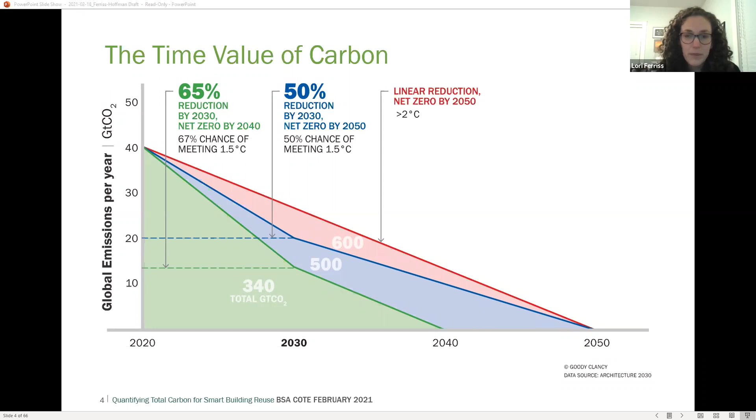At the same time, we're faced with the challenge of astronomical growth in square footage. Between now and the year 2060, we're projected to double our built square footage. That's roughly building a new New York City every month around the world. Trying to reduce carbon emissions while still managing this growth is a huge challenge.

But existing buildings are really an asset here. We know that by reusing and retrofitting an existing building instead of building new, we reduce upfront carbon emissions, the embodied carbon emissions, by up to 70 to 85%. So it really challenges us to think more carefully about how we can reuse the buildings we already have before we build new.

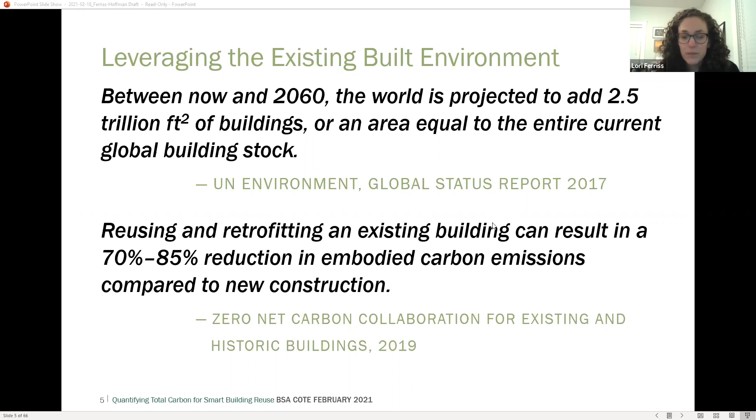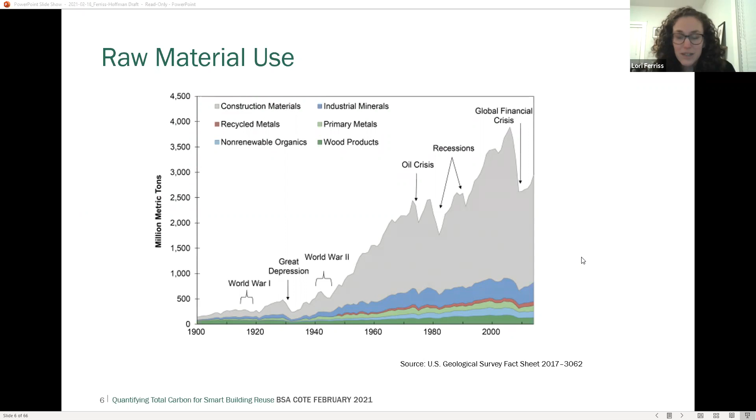And it's not just about carbon, that's what we'll really be focusing on today, but we know that the impacts of building materials expand into all different types of environmental and human health impacts. Globally, raw material extraction is responsible for 90% of biodiversity loss. We know there are tremendous human health impacts associated with processes like manufacturing of bricks. So there are really impacts both at the site of the building and throughout the entire supply chain that we need to be thinking about.

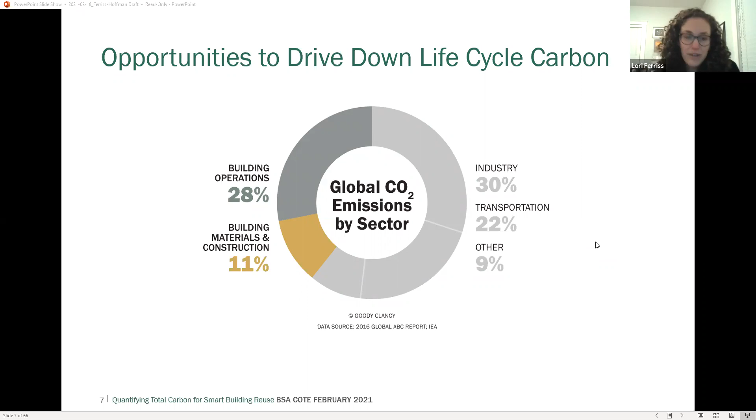Back to carbon, buildings are responsible for 40% of emissions globally. Roughly 28% of that is from building operations, while 11% are from the materials going into buildings. So when we reuse an existing building, we have the opportunity to drive down both of these wedges, both by improving efficiency and reducing operational emissions, and by avoiding the creation of new materials and new construction, driving down that 11% of embodied emissions.

Thinking back to the time value of carbon, it's helpful to plot these emissions over time. Looking at operational emissions, at the beginning of a building's life there are zero operational emissions, and every year as the building runs, it uses a certain amount of electricity, responsible for a fairly steady rate of carbon dioxide emissions over time. Every time we intervene in a building, we have the opportunity to reduce that slope. That's what we're looking to do every time we retrofit or renovate a building, push down that slope as much as possible, resulting in total operational savings over time.

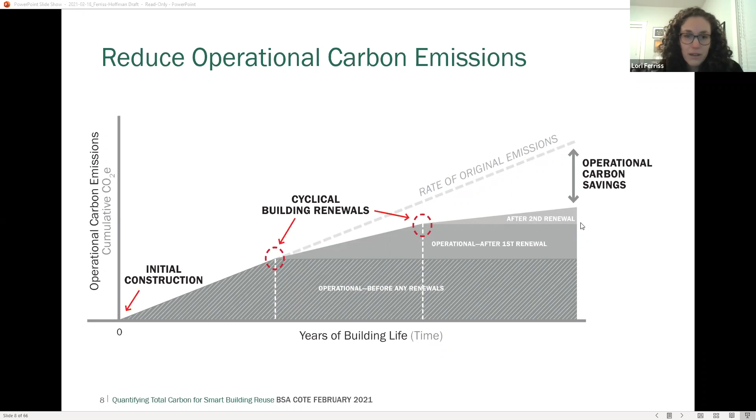With embodied emissions, on the other hand, we start with a large upfront chunk of emissions, but then emissions happen only at those points of renewal, and it's fairly steady the rest of the time. Unlike with new construction, we're not concerned about the embodied carbon of material that already exists—that's a sunk cost. What we care about are the embodied emissions associated with materials we add to the building every time we renew it.

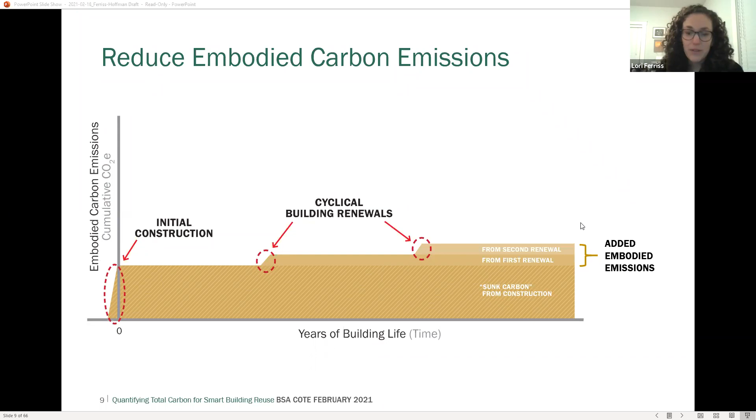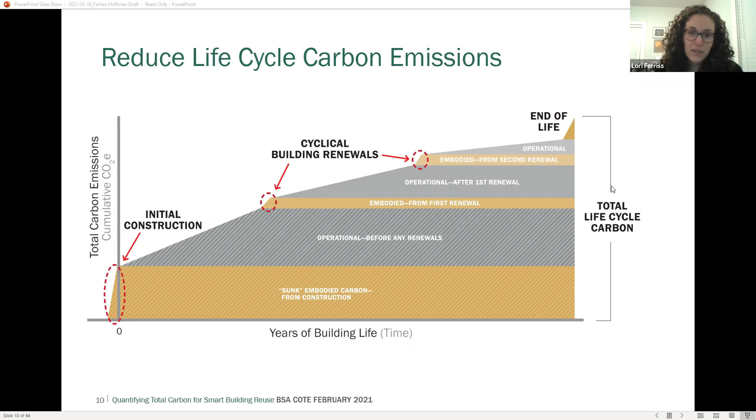Ultimately, it's about the total carbon—adding those two together and understanding the cumulative total carbon over time, and looking for the best ways to reduce it as quickly as possible.

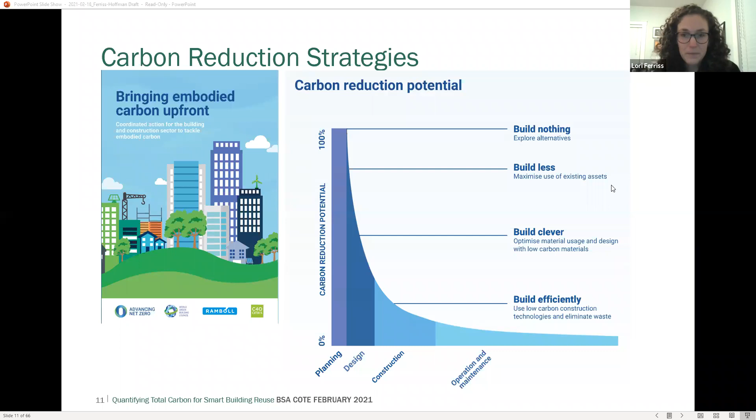I think most of you are probably familiar with life cycle assessment, the tool we use to quantify those life cycle impacts. It's a technique that's actually quite simple, used across many industries, but it just quantifies the environmental impacts associated with all stages of a product or assembly from cradle to grave.

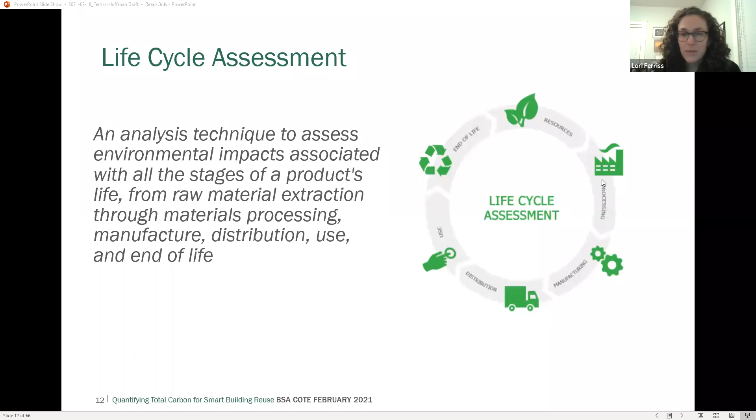I want to end this introduction by pointing out that LCA is a tool like energy modeling or any other analysis tool, and you have to know what questions you're asking to get meaningful data out of it. When talking about life cycle assessment for existing buildings, the range of questions you can ask varies hugely. It can be very detailed—should I use insulation A or insulation B to reduce my carbon footprint—all the way up to the very large scale: how much carbon can I save by reusing this building over the next 10 years? We'll try to illustrate some of this range of questions that LCA can help us answer.

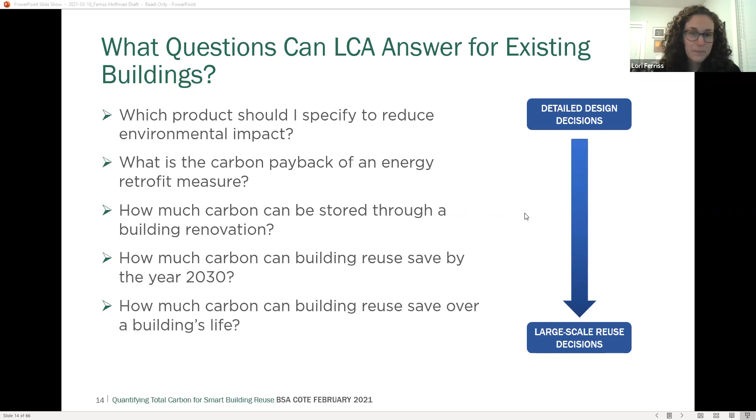So I'm going to pass it off to Elaine for this first case study.

Typically when we think about the best way to reuse the built environment, we commonly think of deep energy retrofits, which tend to be defined solely around operational energy. I'll read these two definitions: Rocky Mountain Institute defines them as a whole building analysis and construction process that achieves much larger energy cost savings, sometimes more than a 50% reduction, whereas the New Buildings Institute defines it as a project that achieves at least 30% energy savings in a building.

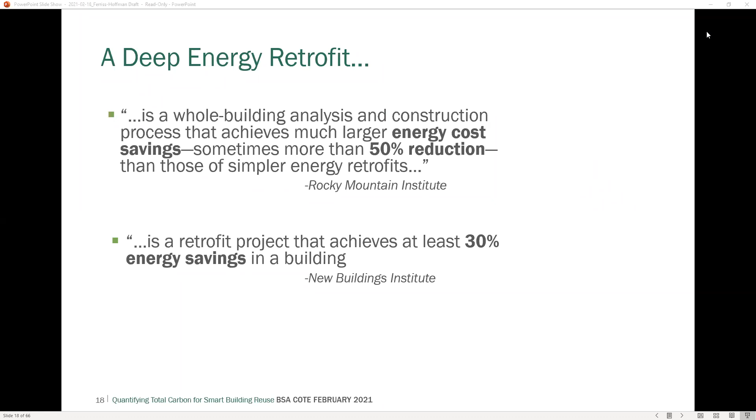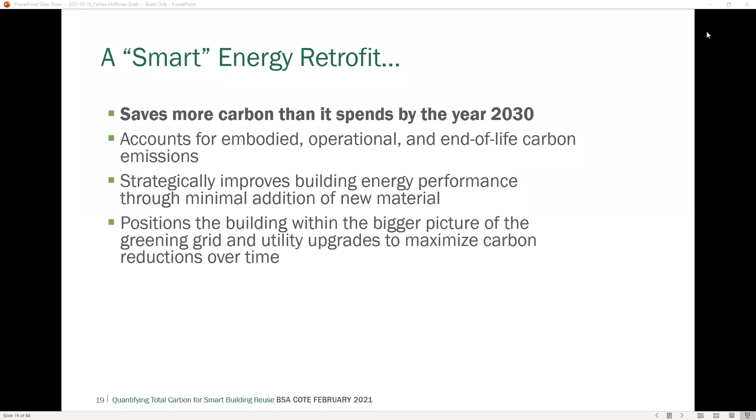But with those definitions, we really aren't recognizing the other carbon impacts. So what we're trying to do through the course of this study is define what a smart energy retrofit would be—one that saves more carbon than it spends by the year 2030. That's the most important aspect of this definition, but it also accounts for embodied, operational, and end-of-life carbon emissions, strategically improves building energy performance through minimal addition of new material, and positions the building within the bigger picture of the greening of the grid and utility upgrades to maximize carbon reductions over time.

So for this study, we began by identifying project goals, established evaluation criteria, created an extensive list of potential scope items, analyzed these scope items relative to the established criteria, proposed phasing and bundling of the scope items, and also drew some conclusions.

Our primary objective here was to establish a method for designing a smart energy retrofit. We also wanted to understand which interventions have the best financial and carbon return on investment, draw conclusions about energy retrofit approaches that are broadly applicable, and create a project that supports the campus's carbon neutrality goals within real world constraints.

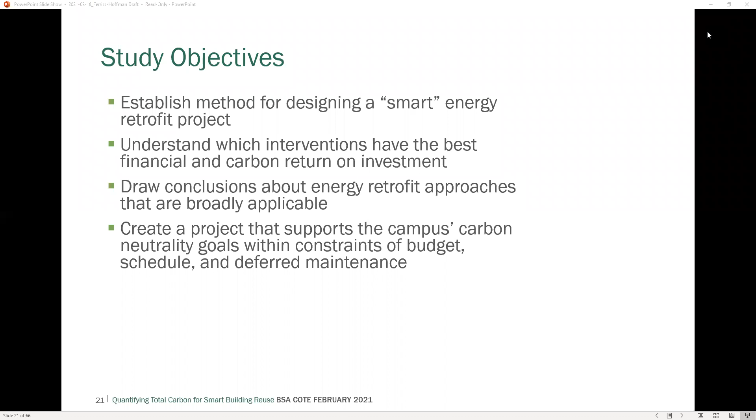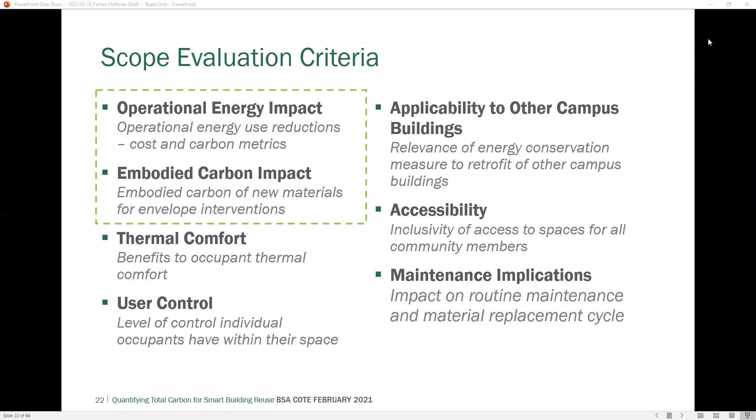For renovation projects, there are clearly many factors that drive the project scope. Over the course of this study, we were evaluating scope items against all of these criteria, but for the purposes of this presentation, we're going to focus solely on operational carbon and embodied carbon impacts.

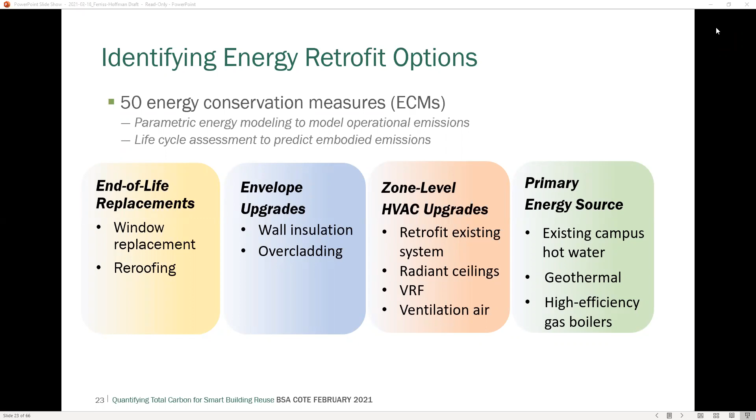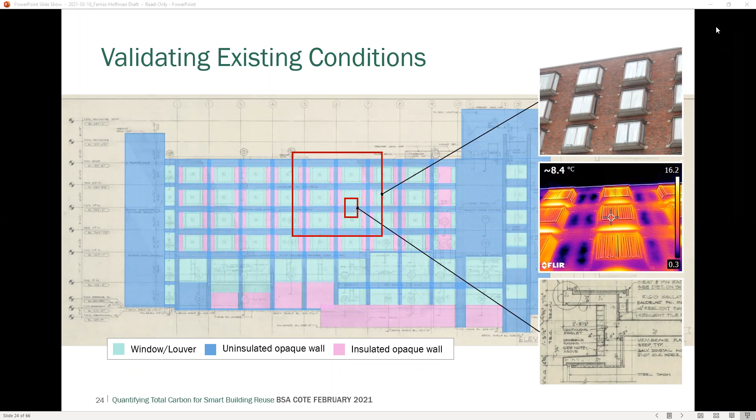And this formed the basis of our first round of analysis.

The first step that we took was to conduct thermal analysis, and Goody Clancy conducted that both for the existing conditions and potential interventions to mitigate some of the more severe thermal bridges in the buildings. That then fed into the whole building energy modeling, both to capture the existing conditions and to analyze the energy conservation measures that we were looking at. Thornton Tomasetti conducted the whole building energy modeling.

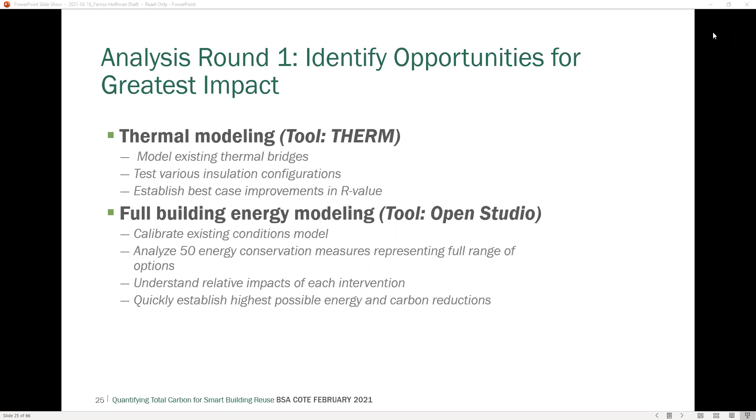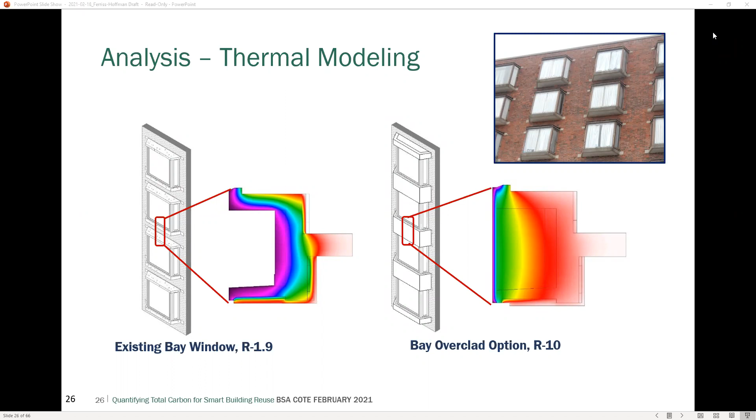Here's an example from the thermal modeling. One of the most significant thermal bridges in the project are these projecting bays, and as you can see in the photo, they were really very prevalent across the whole facade. We looked at several different intervention options, including adding insulation at the interior, as well as over-insulating. This bay overclad option that infills the vertical gap between the bays had by far the greatest improvement to the R value at this location.

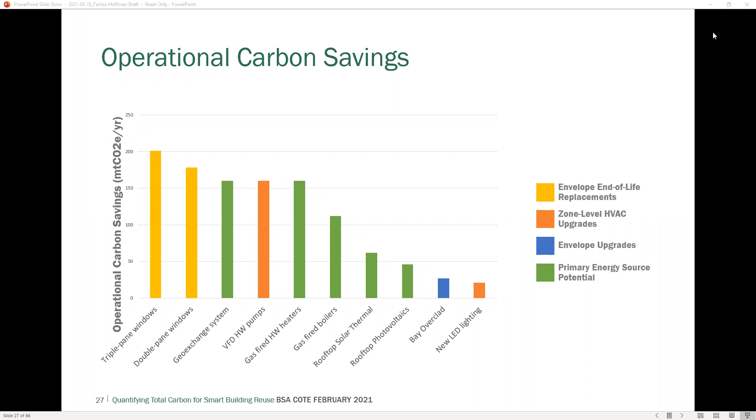So then moving into the second round of analysis, this is where Thornton Tomasetti used parametric energy modeling to study 240 combinations of ECMs and really assess their interrelationships. And Goody Clancy at the same time started conducting the life cycle assessment. So we'll take a look at that.

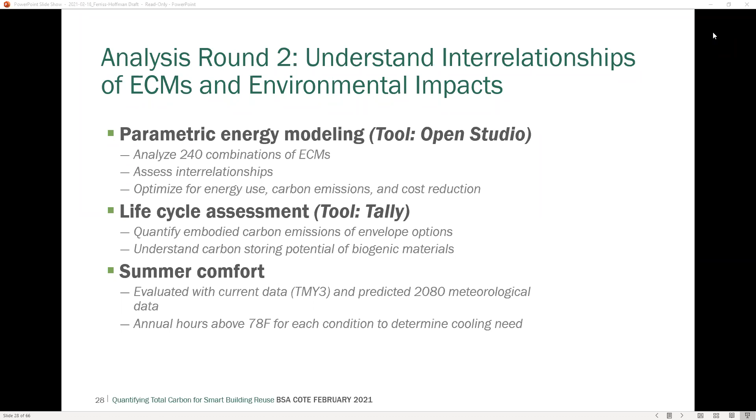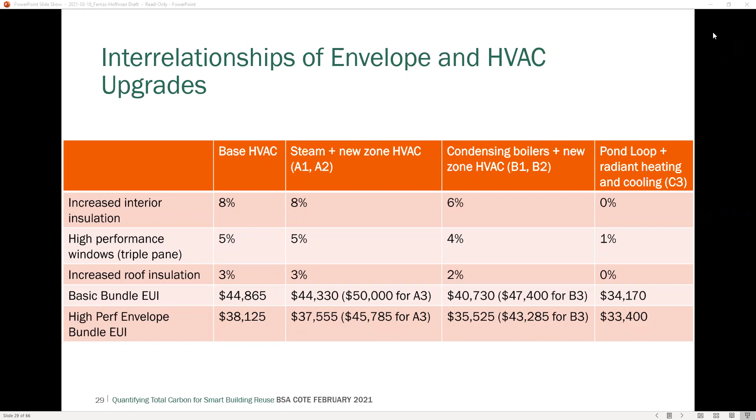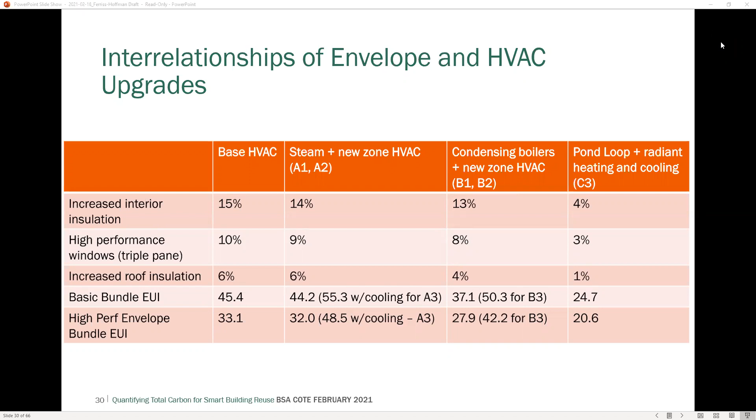If you go to the next slide, this is showing similar information, but in terms of relative EUI impact in terms of cost. That spread is significant, and it represents one of the more important challenges when you're trying to do this evaluation at the beginning of a project, since there are almost an infinite number of bundles. It is important to try and create them, because just looking at these things individually really isn't going to give an accurate picture. So next slide.

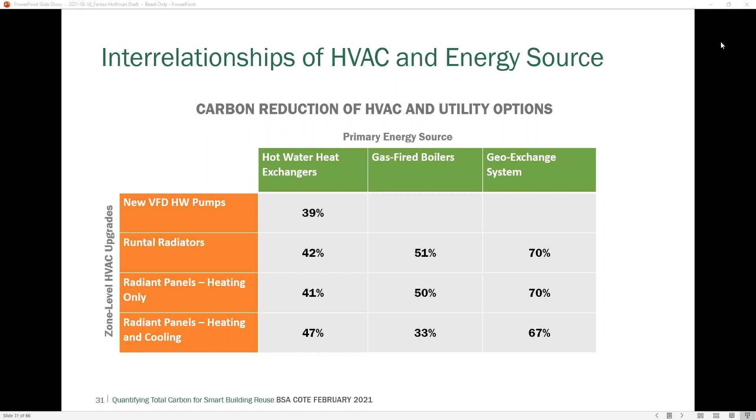This chart is showing similar interrelationships, but instead of HVAC zone level upgrades and envelope, it's looking at zone level upgrades combined with different energy source upgrades. So again, you're seeing a really significant spread, almost double. So we can go to the next slide.

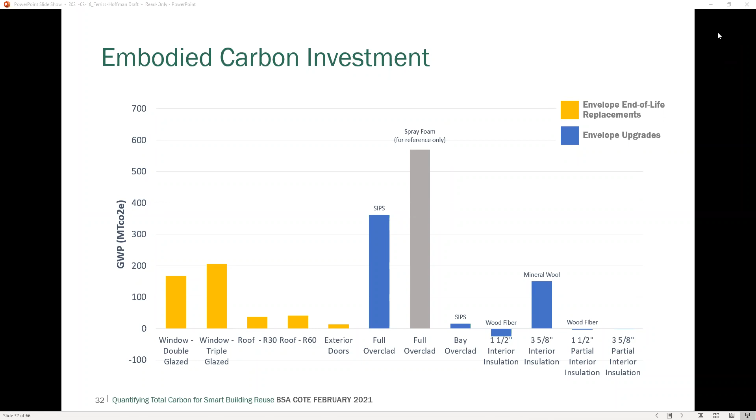So then shifting from operational to embodied carbon, these are the embodied impacts of several of the selected envelope scope items. I think what's important to note here is that there's a very wide range of different impacts, particularly because some of these are showing the same R value improvement, but vastly different GWP impacts. And of course there are a few at the bottom here that are immediately positive, so you obviously want something with as low of an impact as possible. So next slide.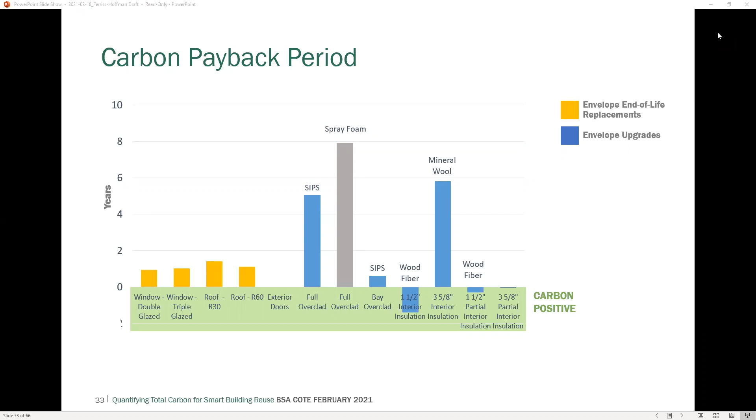Another way to look at operational and embodied carbon together, and maybe a more holistic way than just looking at the payback period, is to chart the carbon impact trajectories over time. So this is showing 4 different scope scenarios from the project, looking at the upfront embodied impacts of the envelope scope items. Bear in mind that the only embodied impacts we calculated on this project were envelope—we didn't include HVAC in that. But nonetheless, these 4 scenarios, while they could all technically be considered deep energy retrofits, are vastly different in terms of both their immediate carbon impact and their carbon impact in the year 2030.

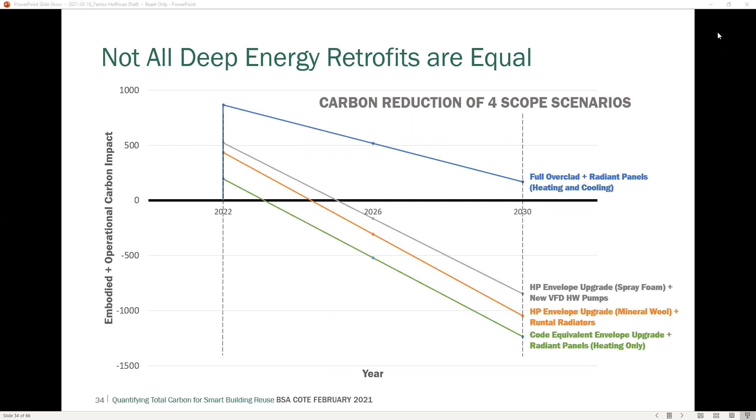If you go to the next slide, another layer on top of that is that it's important to design with the awareness of future utility changes. In this case, there's a planned geo-exchange system for the campus anticipated to come online within a few years. It's important when doing the systems upgrades to take that into account so you can get the immediate savings automatically when that happens. It would be a mistake if you didn't take that into account, because those lines would continue on their other trajectory, creating a larger gap—in this case, what we're seeing is the blue line with really significant carbon savings by 2030 versus what we saw on the previous slide, where it was lingering right around zero. So we can go to the next one.

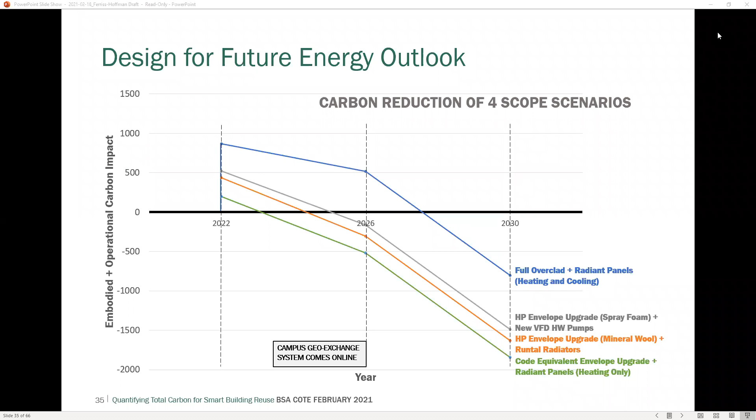So what did we take away from all of this? I think there were some lessons learned that could generally be applied. One is that maintaining the building envelope really does play a very significant role in reducing energy consumption. Consistently in what we were looking at, we saw that it was more significant than the upgrades to the building envelope that you might have anticipated having more dramatic savings.

And also that the carbon reduction potential is limited at the building scale, and building retrofits must be designed for compatibility with greening energy sources to maximize carbon savings—reiterating what we were looking at on the last slide.

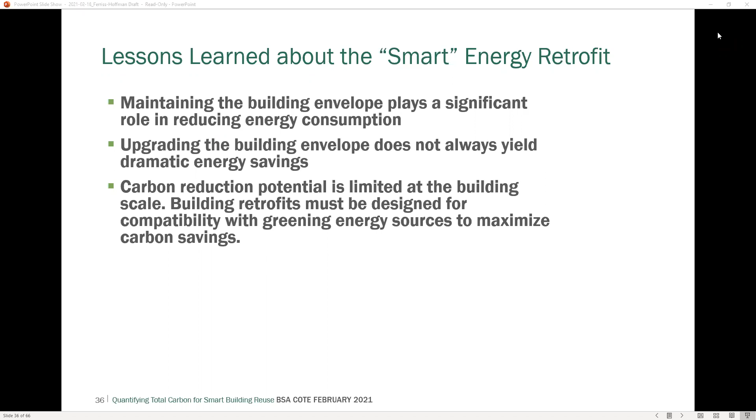Here are some strategies, based on all of the data we were looking at, to make all retrofits smarter. One approach could be to establish maximum carbon return on investment as a project criterion, or to establish a moment in time for which you're trying to optimize carbon impact. Measure total carbon, optimize carbon payback for envelope end-of-life replacement or refurbishment measures, evaluate retrofit interventions at envelope weak points for effective reductions in energy use. And as always, look for opportunities to store carbon through new materials, because that's the best way to get immediate carbon savings.

Thanks, Elaine. So now that Elaine's taken us through this detailed case study, I'm going to bring us back up a few levels to the whole building scale, and look at quantifying the benefits of whole building reuse.

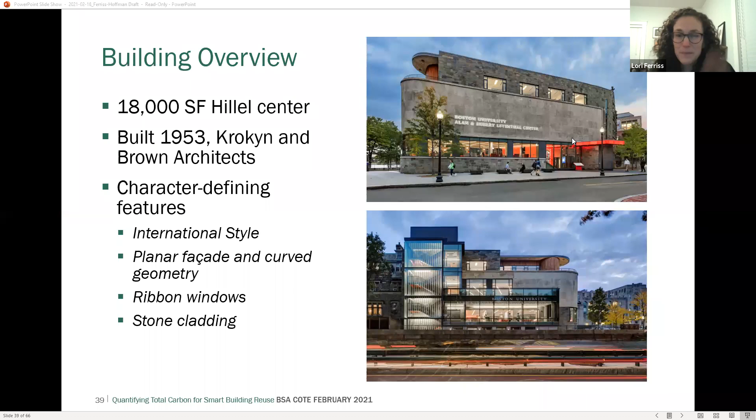I'm going to do this through a case study of the renovation of what was formerly the Boston University Hillel Center, and is now their admissions center. It's this really lovely international style building from 1953, which we renovated with a great team of engineers and consultants.

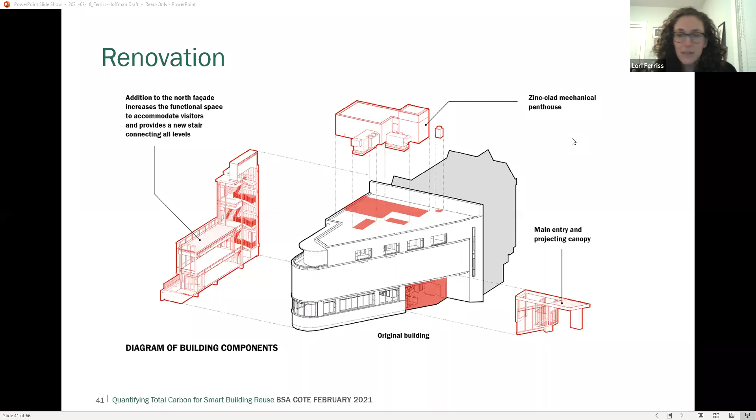This was a fairly intensive renovation. It was a completely new interior, comprehensive renovation with some additions as well. You can see in this axon there's an addition to the north. This building sits along the Esplanade, along Storrow Drive, so we created more transparency and connection to that river view on the north, as well as improved circulation. There was a rooftop addition to house new mechanical equipment, and a new entry canopy to welcome visitors and students from the main campus.

As part of all of this work, we performed a number of upgrades to the envelope, which included all of that new glazing, a new facade, and the existing windows were replaced with double glazing and thermally broken frames. We did insulate the interior face of all of those exterior walls, as well as insulating the roof. And all the systems were new, which included VRF units and high efficiency condensing boilers.

Through all of this work, we were able to maintain 86% of structure and enclosure. We note structure and enclosure specifically because we know those are the two components of the building which contain the most embodied carbon.

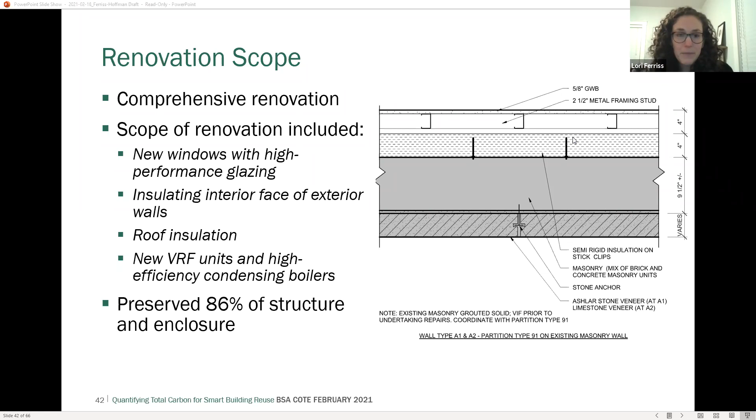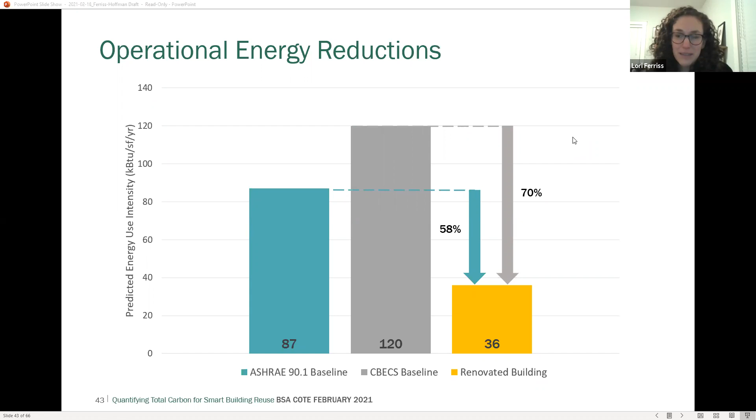With all of that work, we were able to make really substantial reductions in the operational energy use of the building. Compared to the CBECS baseline, we're seeing a 70% reduction. This was exciting for us - it was near the beginning of our Architecture 2030 commitment journey, and this was one of our early projects which met the targets. It was a good precedent to show that existing buildings really can meet those targets just as well as new construction can.

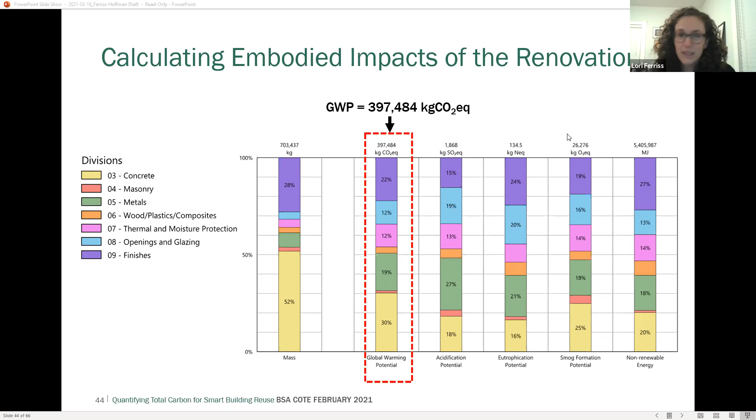More so, we can break that down - we can understand which parts of the renovation, which materials, are contributing the most to that carbon footprint. Even in a renovation, we can see that structure plays a huge role here - 40% of the total impact is from structure. A lot of this has to do with the fact that there were multiple added pieces to the building, as well as a pretty significant amount of site work and retaining walls, new concrete around the substructure of the building.

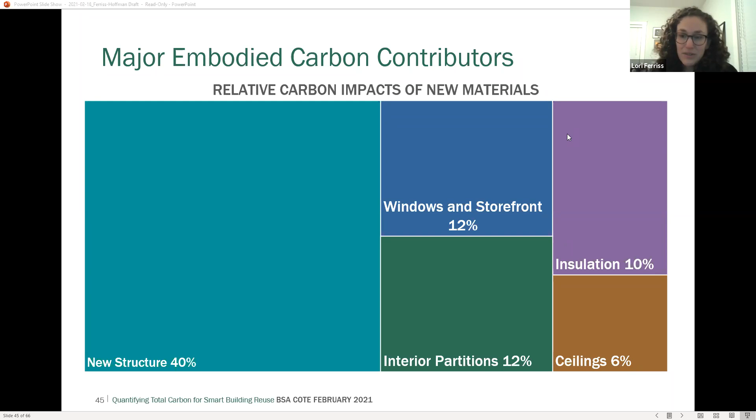And then after that, it's really windows and interior partitions. We find this in most of our renovation projects, which makes sense that when you're completely renovating the interior of the building, those interior partitions have a really large footprint. And insulation, also seen here, is fairly significant.

Once we know what the biggest contributors are to the global warming potential, we can ask ourselves how we can reduce them, how we can take those most important materials and drive down their carbon footprint through material substitutions. So this exercise examined what happens if we trade out traditional drywall for a low carbon drywall like USG EcoSmart. That single material substitution results in a total reduction to the project of 4% of its carbon footprint.

The largest reduction we saw from a single material substitution was through insulation. The project used mineral wool, which is a pretty good insulation, but it doesn't store carbon. So we asked, what if we use cellulose instead of mineral wool, maintaining the same R value? That substitution would have resulted in a reduction of 11% of the entire project's global warming potential. This was really valuable in understanding the kinds of materials decisions we should be making as we retrofit buildings and build new.

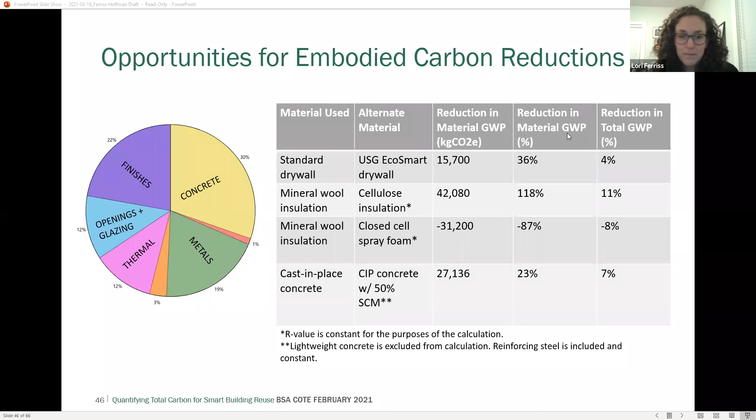Again, it's all about total carbon, so we want to add operational and embodied carbon together and look at them together. On this project, we can look at our renovation compared to a comparable new building. With the renovation, we reduced our operational energy by 70% below CBECS, and from an embodied carbon standpoint, we saw a 70% reduction compared to a comparable new building. Cumulatively, by the year 2030, we've avoided total carbon emissions equivalent to 2.3 million miles driven by a passenger vehicle. It really adds up.

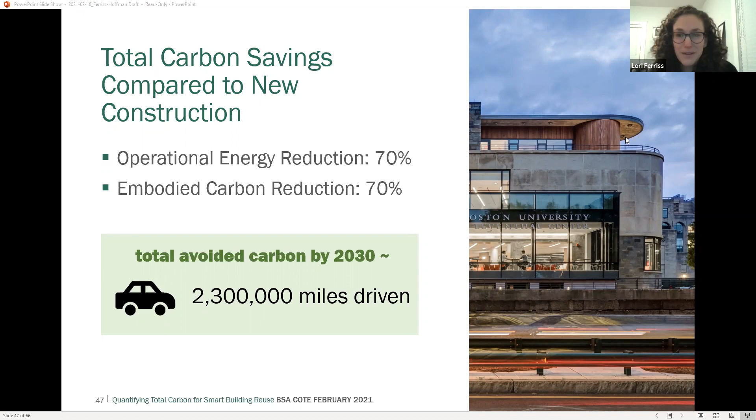We can also look at how those carbon emissions accumulate over time. Starting with the unrenovated building, at year 0, if we don't do anything, there are no embodied carbon emissions, and it operates as it always has, with a slope representing its operational efficiency.

Then layering on the renovated building in orange, you see there's a small amount of embodied carbon at year 0, at the point of renovation, but that slope is dramatically reduced, representing the gain in operational efficiency. With this renovation project, the upfront investment from the materials pays back with that increased efficiency in just 4 years.

We always get the question: wouldn't it be better to just tear it down and build a high performance new building, a net zero new building? So we can look at that too. When we look at a new building of the same size and standard current construction practices, there's a much larger embodied carbon footprint up front. I've even given it an extra 15% reduction in operational energy as a bonus. Even with that boost in operational performance, it still emits more carbon over the first 30 years of life compared to the renovated building.

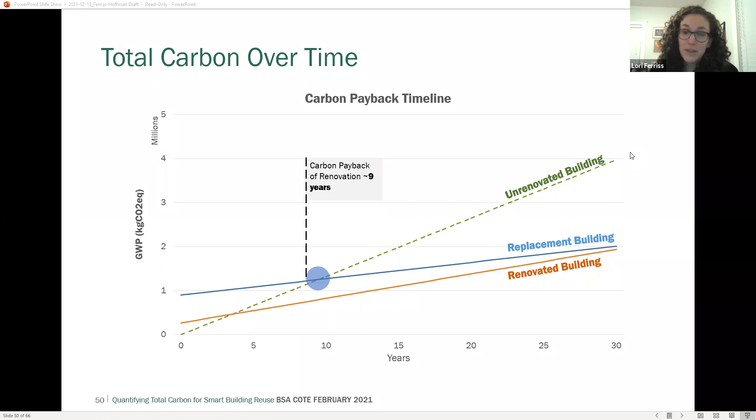But that's not the whole story, because we know the grid is greening. Elaine mentioned this, looking at our renovations in tandem with utilities, which is really important when looking at whole buildings too. In this chart, I've taken into account that in Massachusetts we've committed to an 80% reduction in emissions from our grid by 2050. So particularly if we electrify existing buildings and new construction, those slopes go to 0 as emissions from the grid go to 0. In this case, the renovated building and the replacement building lines never cross, meaning that for the rest of its life, the renovation results in a lower carbon footprint than the replacement building, no matter how efficient the replacement building is.

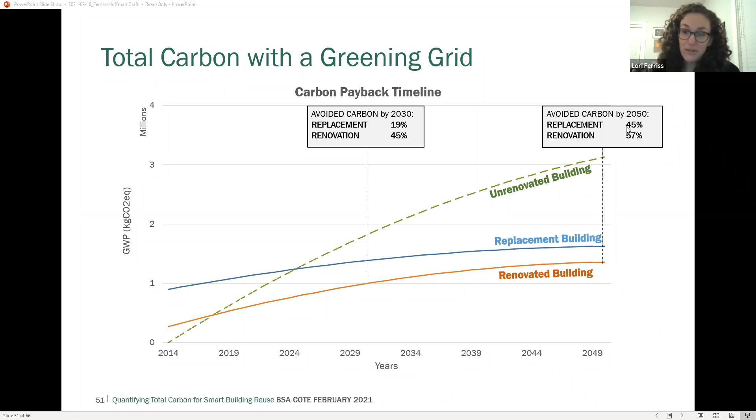That's the end of the case studies, and I want to leave you with a preview of a tool I've been developing with Larry Strain of Siegel and Strain Architects and Erin McDade of Architecture 2030. This tool is meant to help people answer the question: how much carbon do I save by reusing an existing building? How can we easily put a number to the old saying, the greenest building is the one that's already built?

So the tool evaluates total carbon emissions of existing building reuse compared to new construction. It's really an early stage tool, targeted at planners, preservation officials, building owners or developers who want to understand: I have an existing building, what's the best thing to do with it? How much efficiency do I need to gain, or what decisions do I need to make to understand the total carbon potential of that existing building compared to a replacement building?

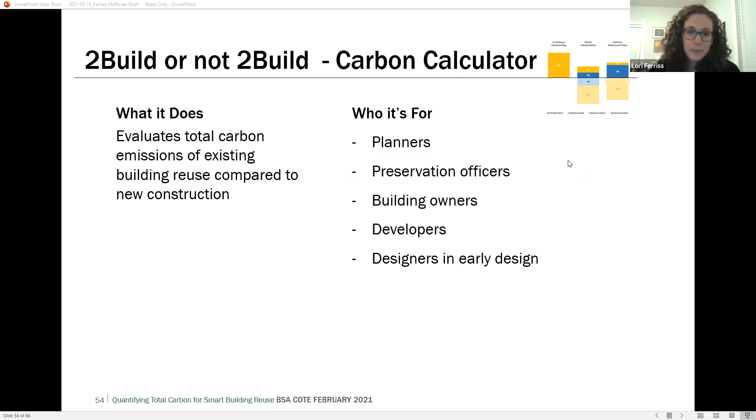So it looks at three scenarios: an existing building baseline, a retrofit, and a replacement, similar to the charts I just showed. And it quantifies embodied carbon, operational carbon, and avoided carbon impacts.

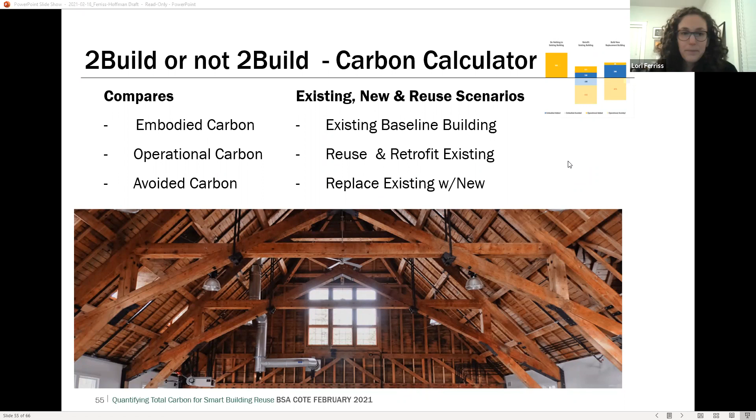This is a quick peek at what it looks like, although it might look different by the time anyone sees it again. It's an Excel tool with drop-down menus. There are a number of options you can select for those renovation and upgrade choices.

There are a lot of ways to reuse the building, and there are four options for new construction. You can select to try and represent closely the building you would put back. There are options for operational efficiencies—you can set the target EUI you're trying to achieve for both the existing building and the new building. And there are embodied carbon modifiers to customize this as much as possible, to account for things like poor soils, blast resistance criteria, that sort of thing.

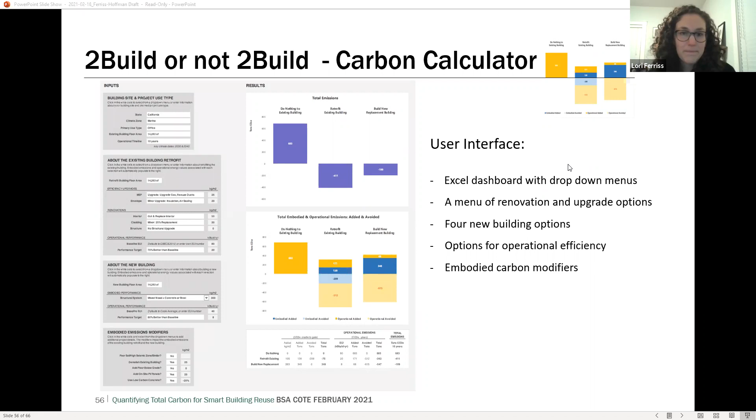So just for this presentation, I ran that BU case study through the tool to show you how it works, and also to check the tool's data. It came out pretty well, which was reassuring.

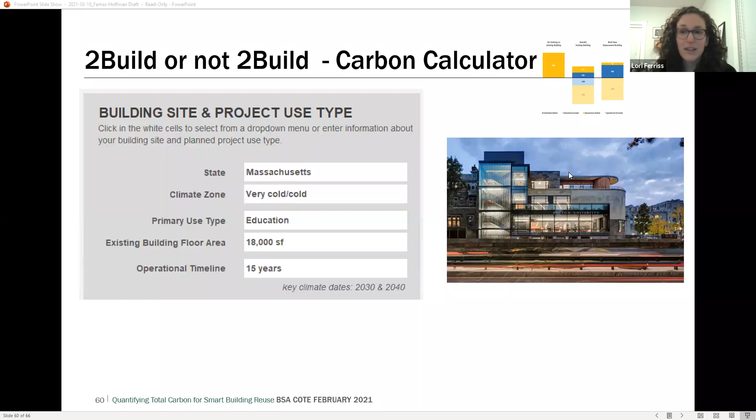So you start by entering the basic building information: the location, the climate zone, its use type and size, as well as the timeline you're looking at. That's really important because this tool is meant to look at near-term impacts to meet carbon neutrality targets—so we're really looking at a 10, 15, 20-year life here.

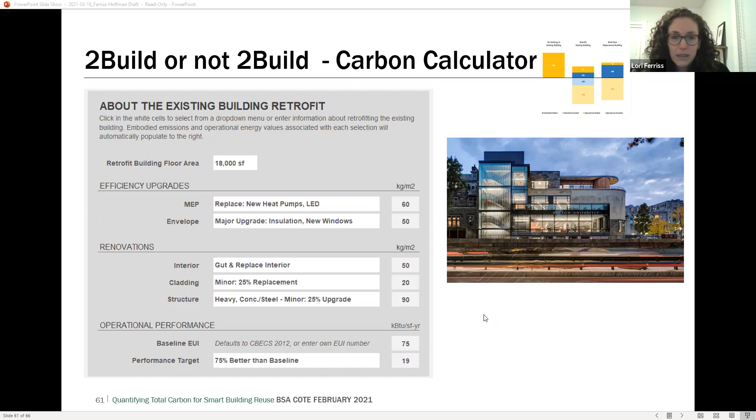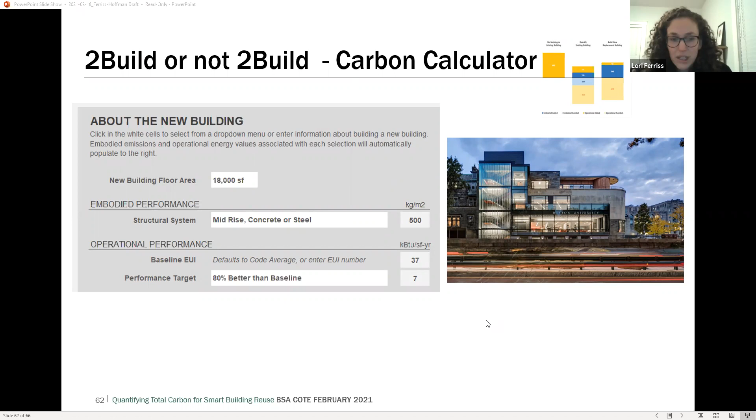So we've entered the existing building information about the upgrades, as well as the extent of renovation on the interior, and set a target for performance. We can then approximate what the new building would be. In this case, I'm saying the new building would be the same size, typical concrete or steel construction, with an 80% reduction in energy use below code.

And I have not included any embodied emissions modifiers. So what you get is this chart, which shows you the carbon of doing nothing to the existing building, retrofitting it, and replacing it. You can see the contributions from embodied and operational emissions, as well as the avoided emissions from each of these decisions.

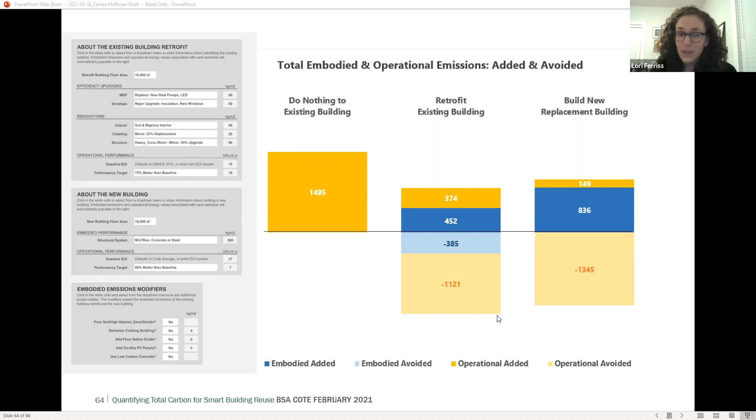It also summarizes the total carbon, so you can quickly get a high-level relative quantification of doing nothing to a building, retrofitting it, or replacing it. And it's interesting to see how this changes.

It really does change a lot based on things like your grid. For example, if you're in a climate with a very dirty grid, then replacing an existing building with a net zero new building may actually make sense, whereas if you have a clean grid, the performance of the new building makes less of an impact. So anyway, we think it's a pretty nice way to quickly see that total carbon story.

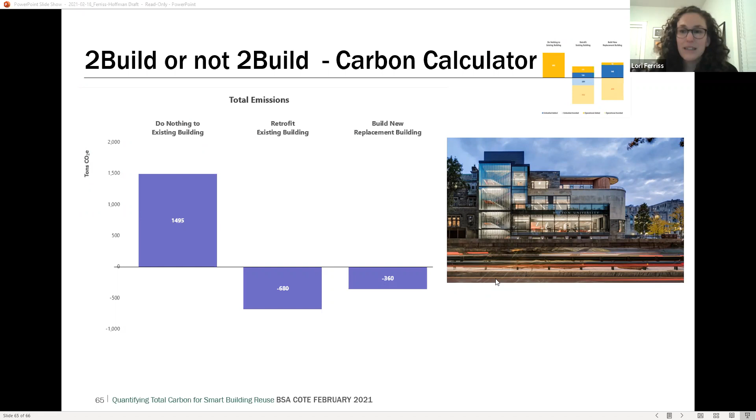I'll leave you with a few resources. If you're interested in learning more about this intersection of carbon and existing and historic buildings, the Carbon Leadership Forum is an amazing resource for all things related to embodied carbon. The Boston Society for Architecture's Embodied Carbon 101 series, which is online, is really great. And the Climate Heritage Network and ZNCC are both resources and groups to get involved with if you're interested in existing and historic buildings and climate action.